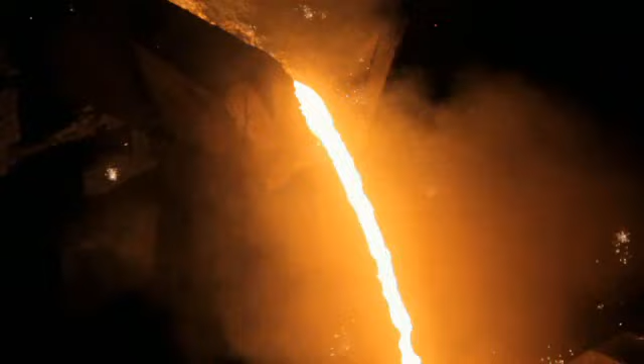Depuis plus de 20 ans, Saint-Gobain PAM participe au développement du secteur hydroélectrique dans le monde entier en fournissant ses canalisations en fonte ductile.

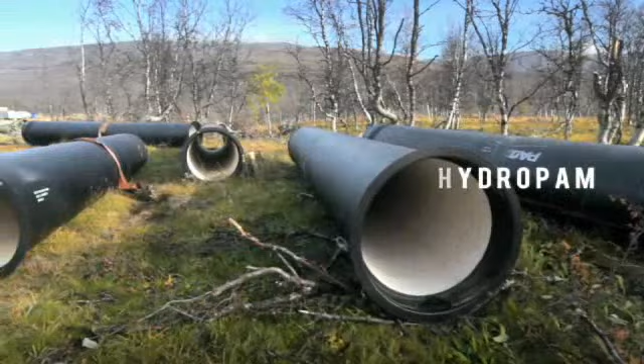Tussa is a power company located on the northwest coast of Norway, and we produce electricity mainly from hydropower. And hydropower is one of the solutions when it comes to clean energy.

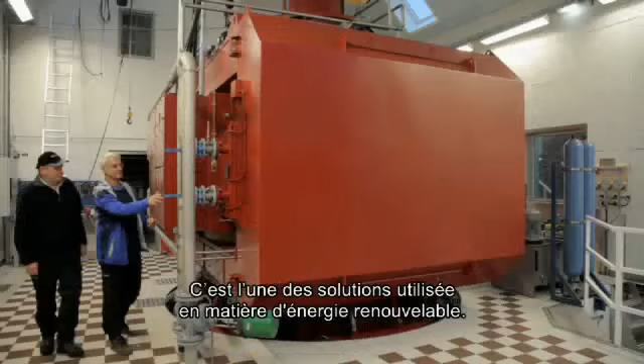Norconsult has been in the hydropower business for at least 100 years altogether, and we are working worldwide with projects in all areas of the world. The potential for hydroelectric power plants worldwide are enormous.

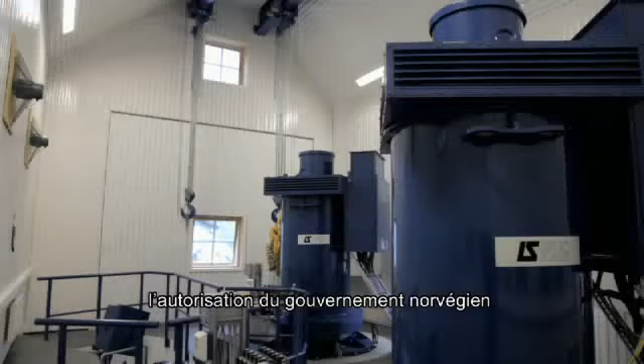Even in Norway specifically, we have seen that we have built at least 500 new small power plants the last decades. And we are awaiting at least 700 or 800 in line for the Norwegian government to approve. So the potential is enormous.

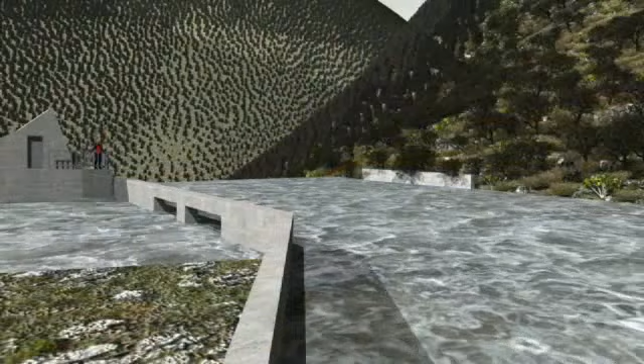La solution HydroPAM répond parfaitement aux exigences techniques et environnementales des centrales hydroélectriques en zone montagneuse. Captée par une retenue d'eau située en amont, l'eau s'engouffre dans une conduite en fonte ductile.

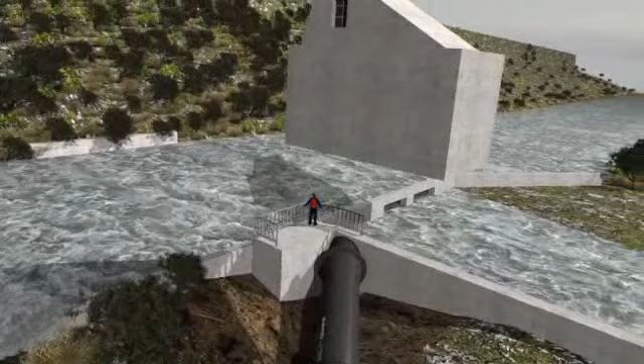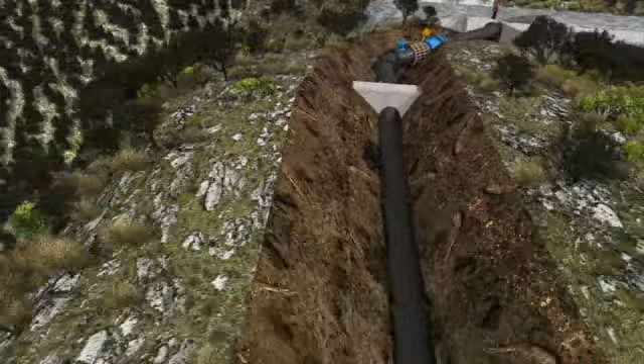Le débit est régulé par un dispositif de vanne de sécurité. L'énergie gravitaire de l'eau ainsi canalisée est récupérée par une turbine implantée en aval, elle-même couplée à un générateur qui la transforme en énergie électrique.

La canalisation est enterrée sur toute sa longueur et la petite taille des installations permet une véritable intégration de la centrale dans le paysage.

Hydropower plants last very long, and we have to have pipelines that last as long as our plants, and ductile iron is a very good choice when it comes to lifetime.

La capacité d'une centrale hydroélectrique est fonction du débit et de la pression. Il faut des canalisations robustes, fiables et durables.

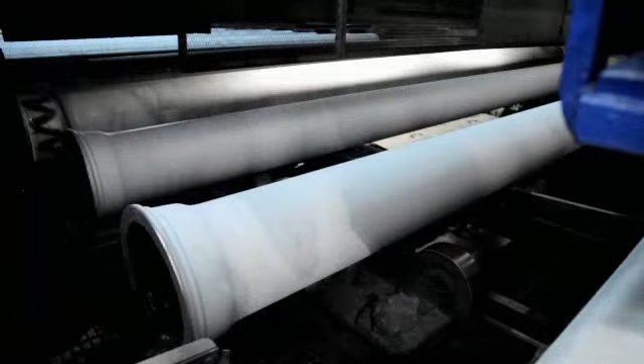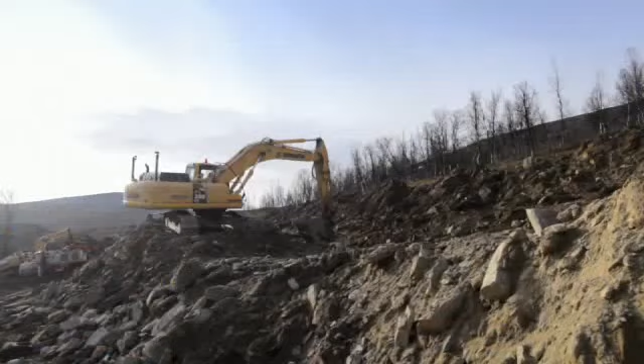Fabriqués en fonte ductile, les tuyaux HydroPAM sont dotés d'une très grande résistance à la pression et aux charges des terres. Leurs performances mécaniques sont stables dans le temps et les rendent moins dépendantes des caractéristiques des sols.

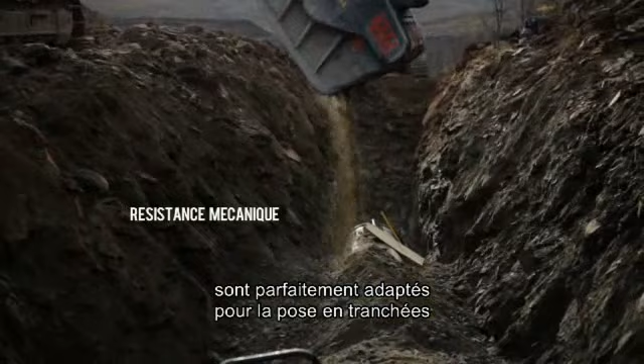The ductile iron pipes are perfect to lay in the trenches and by using the local material for backfill. Ductile iron pipelines are very solid, and big excavators, they handle the tubes very roughly.

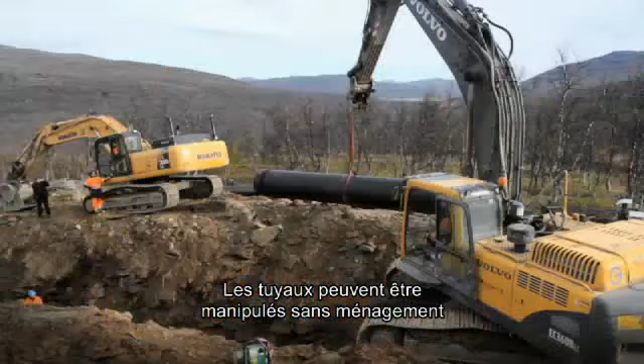And when it comes to laying the pipelines into the ditch, they can also handle small deviation, 2 or 3, 4 degrees among each length of a tube.

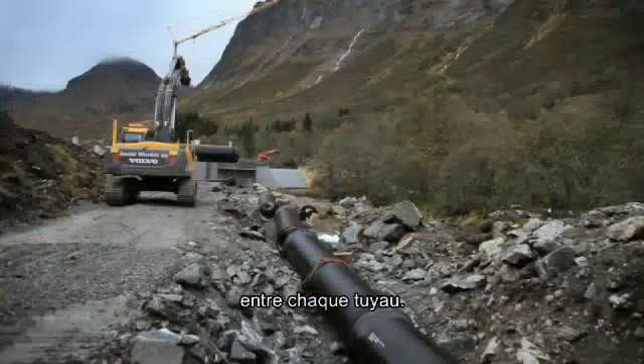And that's very well suited for our terrain because it goes up and down and turns both in the horizontal and the vertical plane.

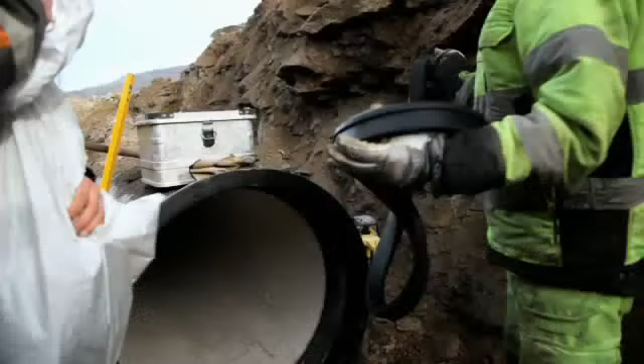We have found it very nice to use anchor joints that make it possible to lay several hundred meters of pipes in steep inclinations with only one anchoring at the top.

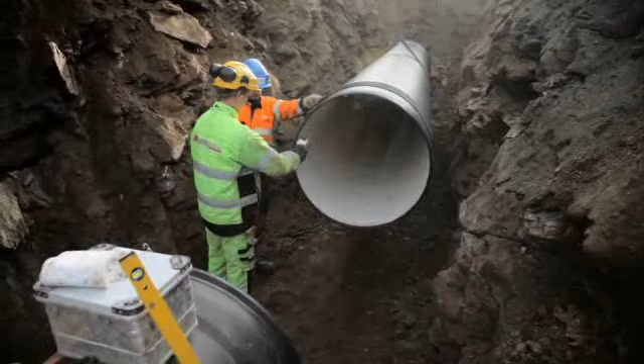La technologie des joints à emboîture permet un assemblage en tranchées facile et économique en utilisant des équipements standards de chantier.

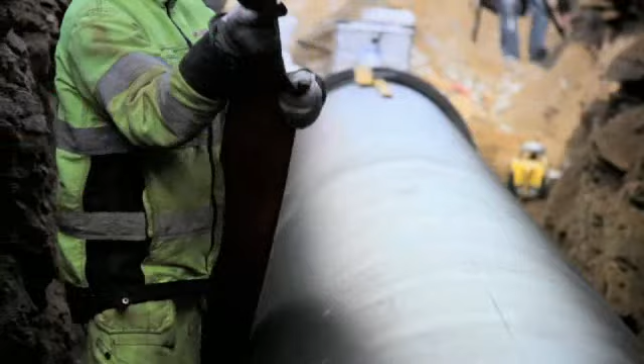Ces joints très flexibles s'adaptent parfaitement aux mouvements de terrain. Ils peuvent être facilement verrouillés dans les pentes, sans soudage, évitant ainsi d'importants travaux de maçonnerie.

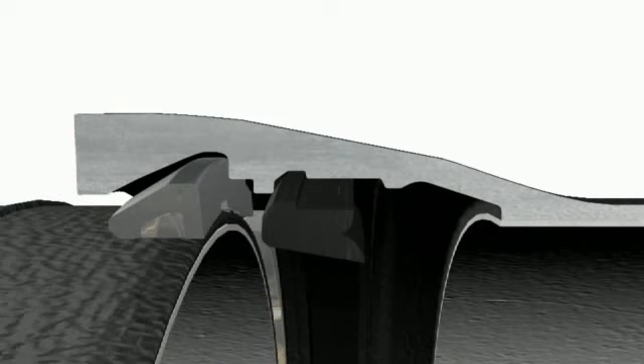We have experiences from laying the pipelines during all the year in summer conditions, winter conditions, and we have no problems handling the pipelines all year round.

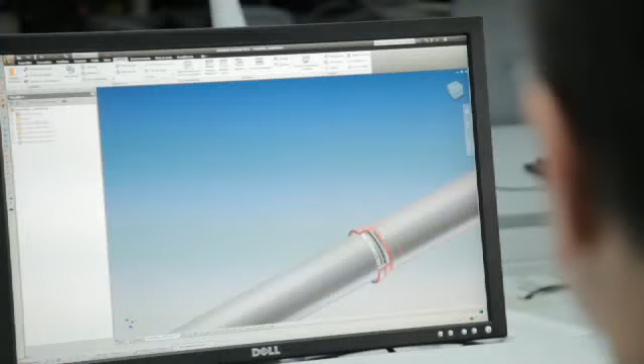Saint-Gobain PAM propose son expertise technique à toutes les étapes d'un projet, de la conception jusqu'à la pose en tranchée et en pente.

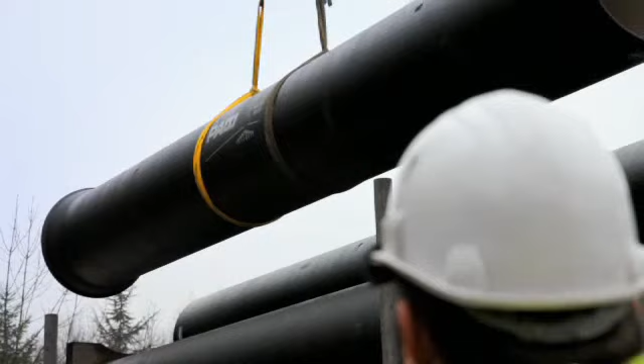Son service après-vente assure le suivi logistique des livraisons des tuyaux sur des sites souvent difficiles d'accès.

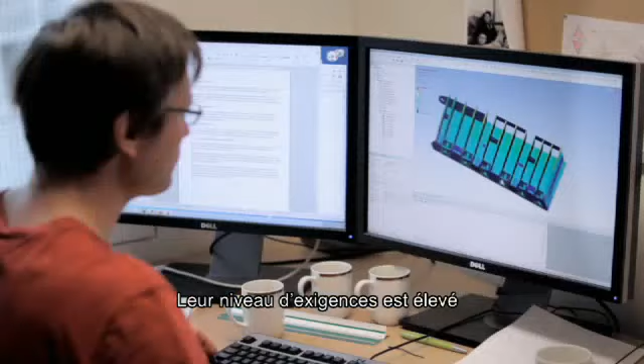The security requirements in Norway are quite difficult because we have a Norwegian water authority and they are following all the building and all the finished power plants and also the power plants that are planned. They are having quite big requirements for the security of the power plants.

Ductile iron pipes are very good at fulfilling these governmental security demands.

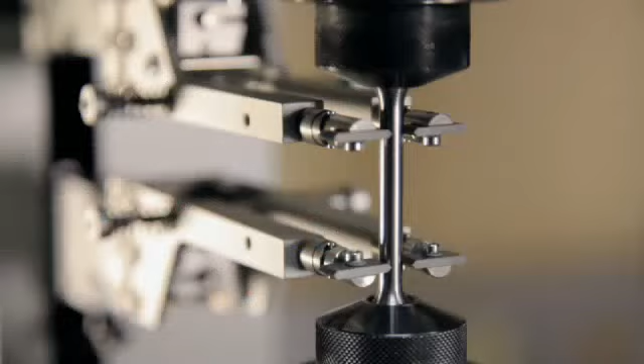Les centrales hydroélectriques répondent dans chaque pays à des règles de conception et des normes de sécurité très spécifiques. La gamme HydroPAM, développée pour cette application, a fait l'objet d'une attention particulière dans les laboratoires de Saint-Gobain PAM.

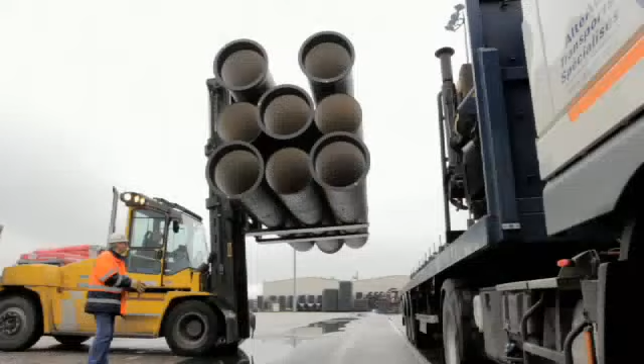La fiabilité des tuyaux est assurée par la mise en place d'un plan qualité rigoureux au cours du procédé de fabrication et la réalisation de tests de résistance sur les produits finis.

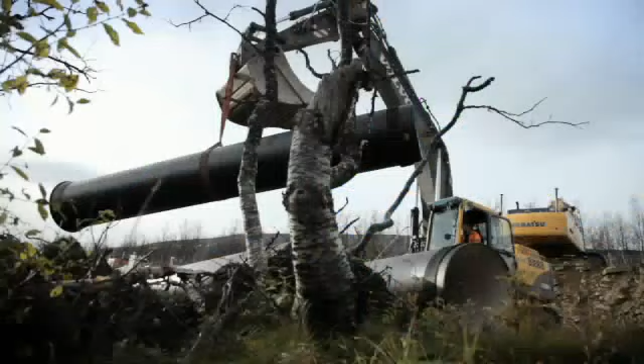En collaboration active avec les concepteurs et les exploitants de centrales hydroélectriques, les ingénieurs de Saint-Gobain PAM ont élaboré la gamme HydroPAM, technologie qui rend plus facile et plus sûre la réalisation des centrales.

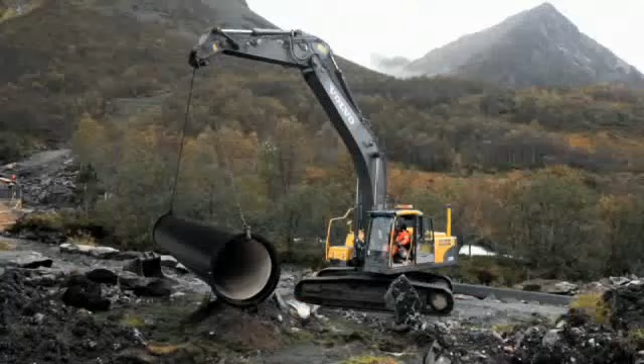HydroPAM est une solution complète et économique qui permet chaque année la construction de plusieurs centaines de centrales en Europe et dans le monde entier.